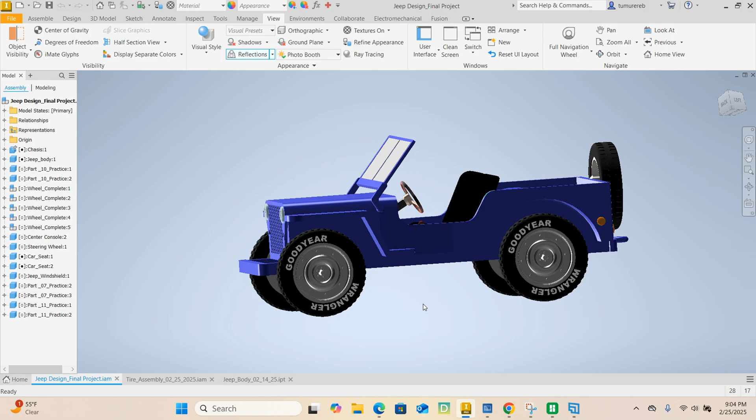Welcome back. We are continuing our practical applications with Autodesk Inventor, and this is going to be your midterm project. It is a Jeep. We are designing a Jeep that can be 3D printed.

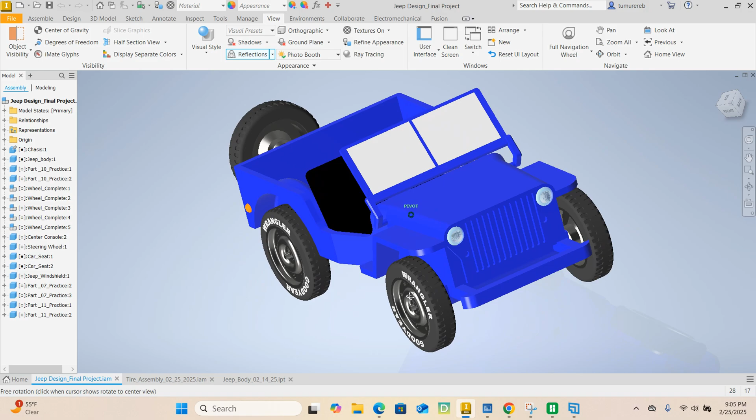The way we're going to do this, we'll do one part at a time. So what have we done so far? We finished the tire, and next we're going to do the body, and then the seats. We also have the dashboard, steering wheel, windshield, and lights. So it's going to cover almost everything we have seen so far.

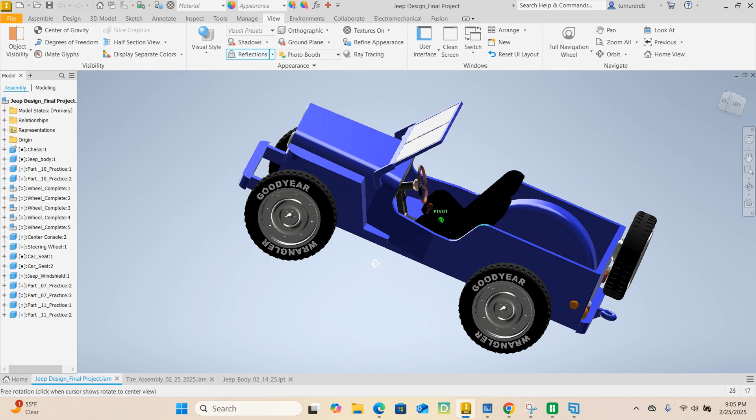Alright, so last time we did a tire, so we completed the tire. And now let's go ahead and work on the body.

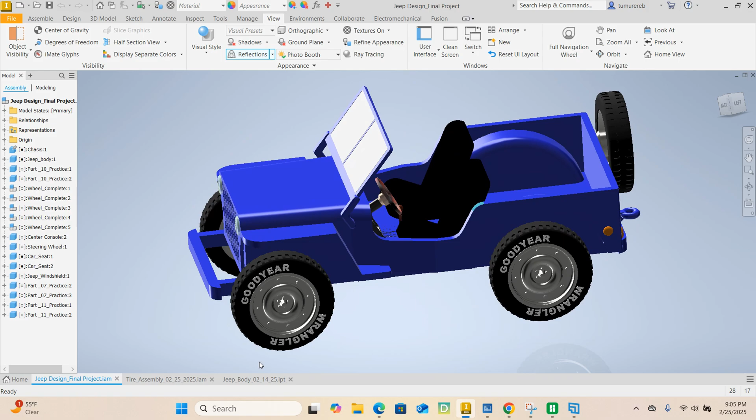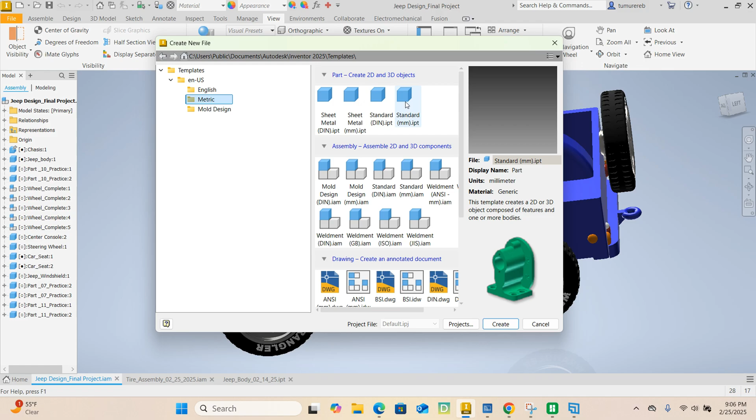This is very important, make sure your units are correct. If you don't pay attention and use the wrong units, then when we do assembly, everything is going to be out of scale. So pay attention. File, select new, metric, so we are in the metric standard.ipt, and then create. Alright, so the body, that's what we're going to do.

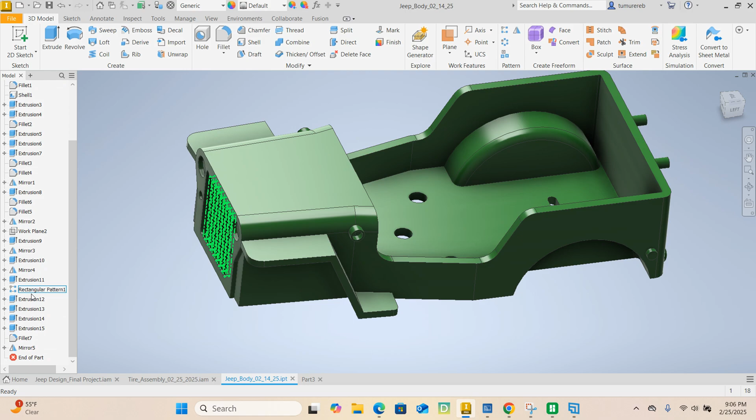The first step is done. Now, if you look at the body, it is essentially a box. Look at my browser history, it's extrude, extrude, extrude, extrude. There's no new command you haven't seen. This is going to be a very quick one.

I'm going to go in and do a 2D sketch. Let's go ahead and start a 2D sketch on which plane? XY plane. Draw a horizontal line starting at origin. How long does this need to be? Let's make it 240.

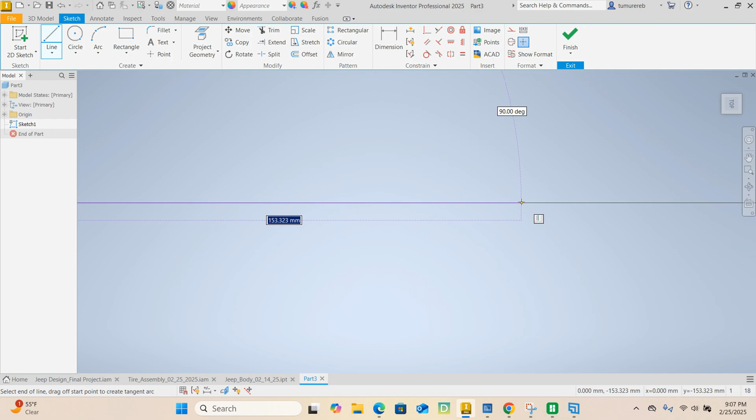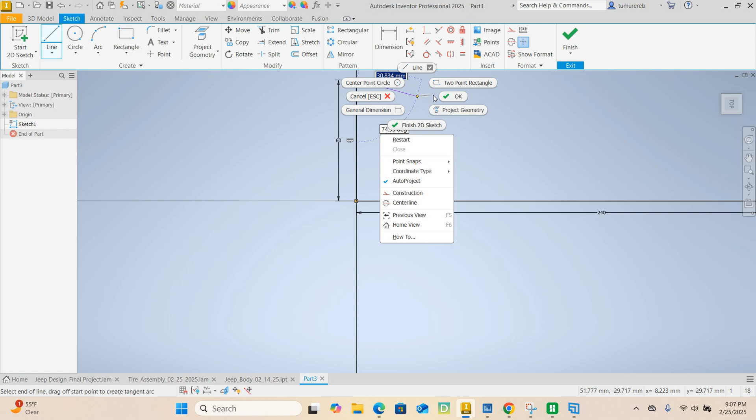And then we're going to come at the origin, draw another line. This one needs to be 60, and make sure it is drawn at a vertical angle, so it's 90 degree, so it's perfectly vertical. And this one is perfectly horizontal.

And then from here, I'm going to draw another one. This one, again, look at my constraints. This one's going to be 110, and it's exactly drawn at 90 degrees.

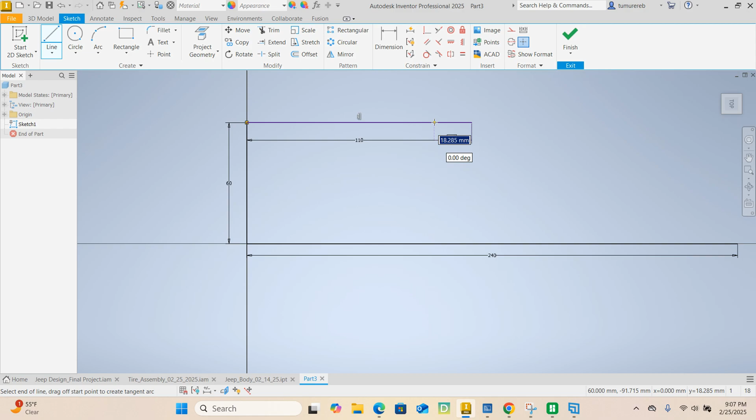So next we're going to draw a slender line like this. I'm going to draw it over here, and I drop another one there, and then close your profile here.

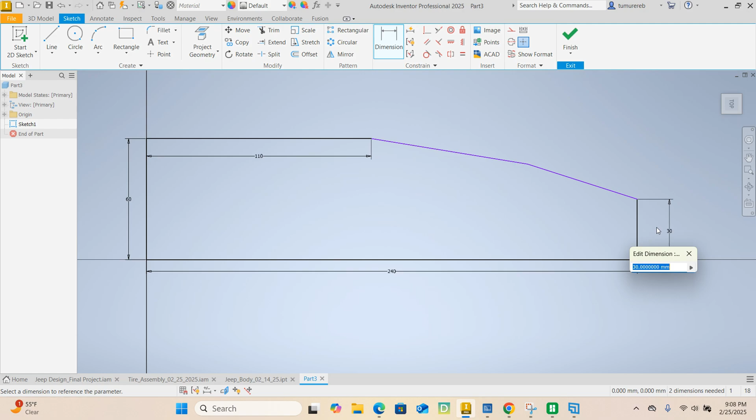Awesome. Now let's go ahead and add dimensions. So from here to this point, that distance needs to be 40, and from here to there, that needs to be 44.

This horizontal distance is 64.

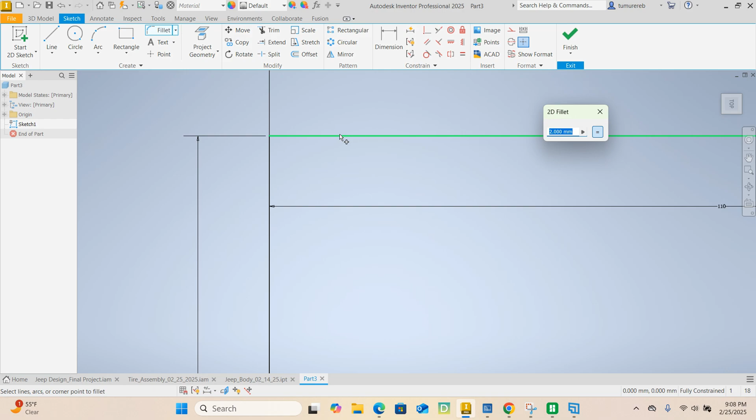Very well. Now let's go ahead and add a fillet, this corner of 6, radius of 6. Fillet that. And I'm going to zoom out so you can see what I have.

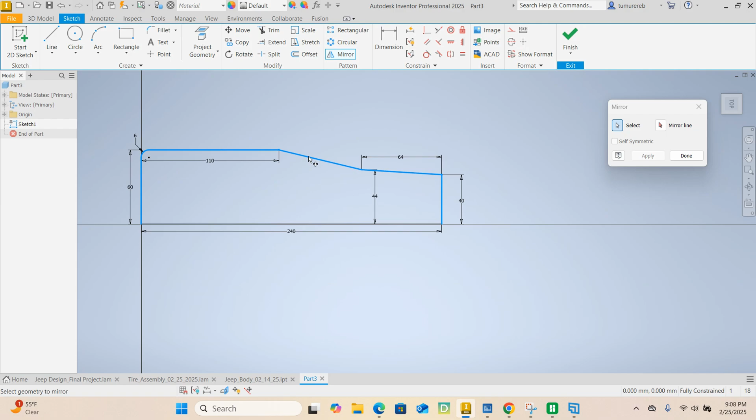Alright, now let's go ahead and apply the mirror command. We're going to select this and that. Okay, the mirror line is going to be this one. Apply, and done. Now select this line, make it a construction line, and then finish.

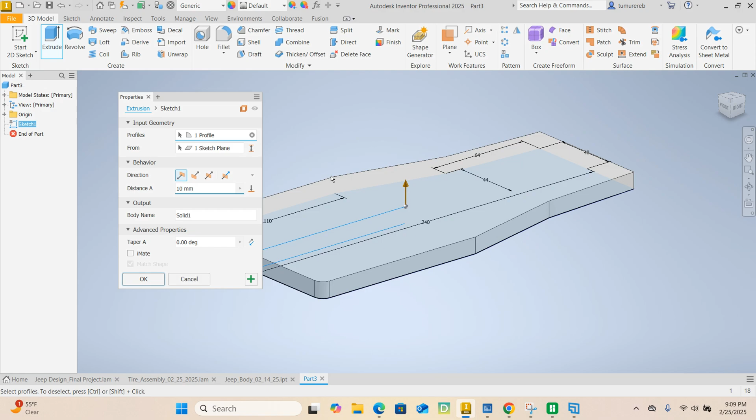What are we going to do next? You guessed it right. Go ahead, extrude. How much? 10 millimeters. Well done. Part 1 is done. So remember, this is what we're trying to get to.

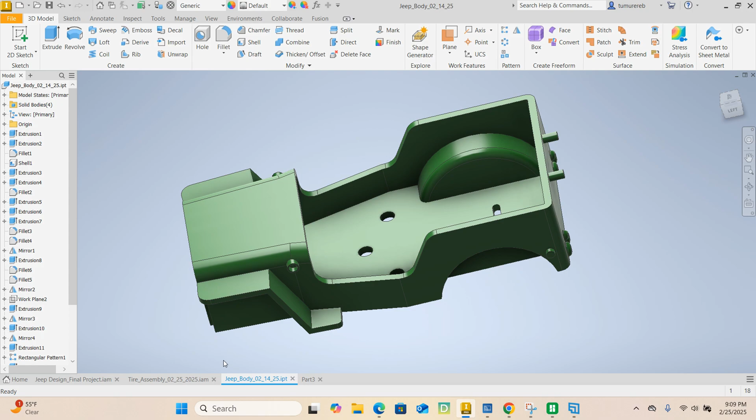Okay, so if I go here, extrusion 1 is done. Let's keep going. Select this top face. Start a 2D sketch on it.

Project geometry, project geometry. Select this face. Project geometry, and then right click. It's too easy for you guys.

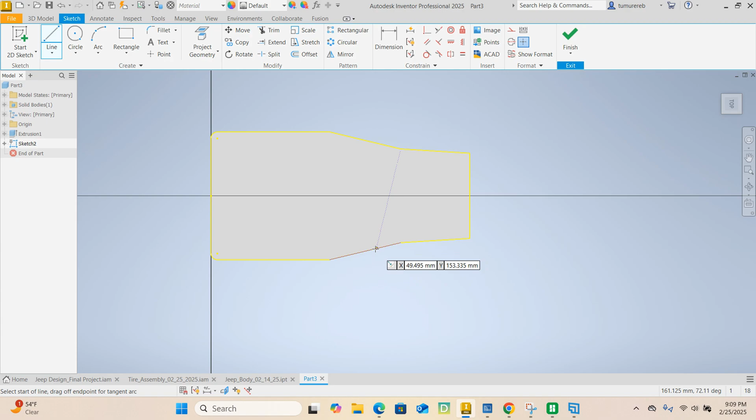And then we're going to do what? Draw a vertical line from this point to this point. That distance is going to be 76. From here to here is 76.

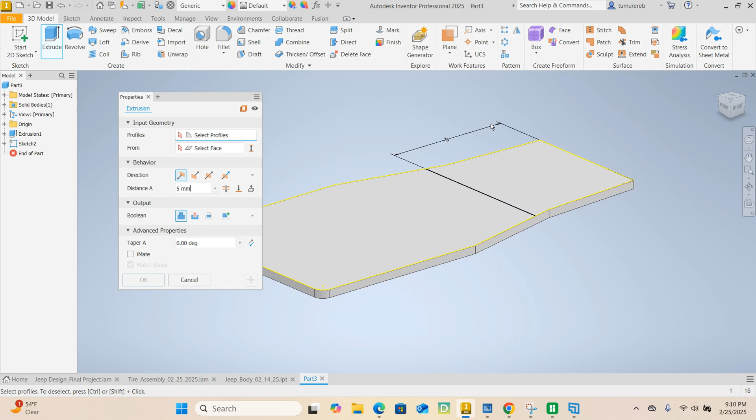Finish, and do what? Extrude. How much do you need to extrude it by? 50. Well done.

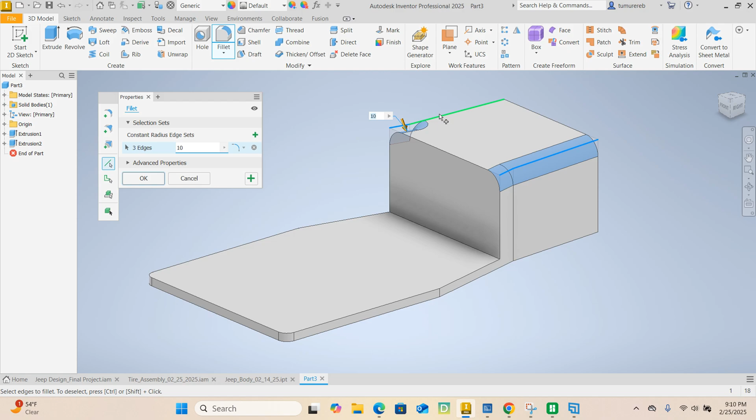We can go ahead and add fillet. Radius is going to be 10. We're going to fillet these edges. Radius of 10. Click OK.

Select this side. Launch your shell command. Remember the shell command? What's the thickness? Let's do 5. Thickness is 5. And I click OK.

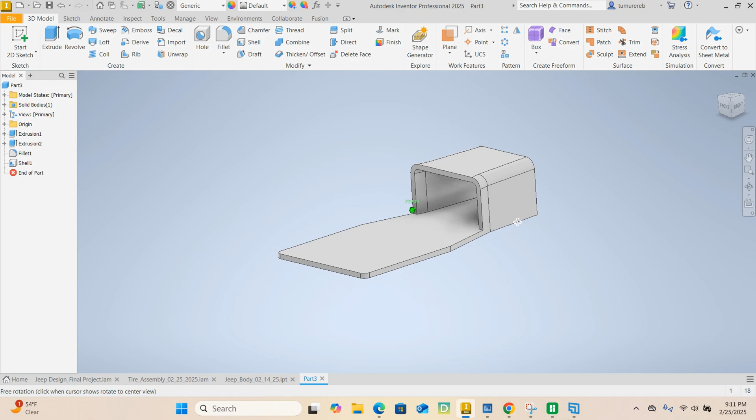Done, done, we are almost there. It looks like a shoe right now. Awesome, I'll select this guy.

And what do we do now? Project geometry again, project geometry, select the face. Now we can offset it. How much are we going to offset it? Now, when you offset, make sure you have loop select unchecked.

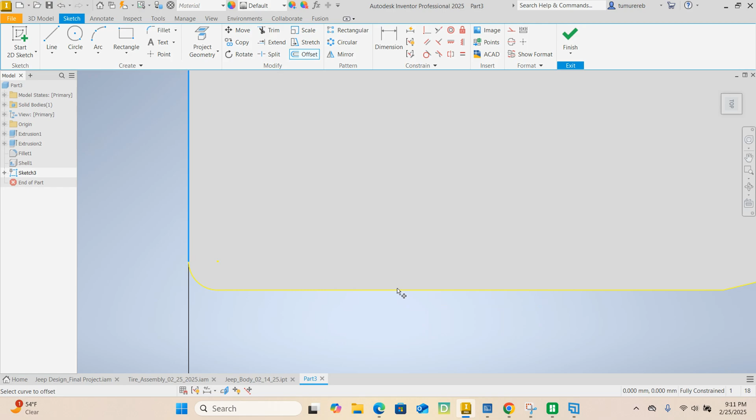How do you do that? Offset, then right click, make sure loop select is unchecked. Alright, what that's going to allow you is to select each part separately, each line separately, each geometry separately. Now, why is it not selecting there? There you go, there you go.

Now we can offset it by how much? Type in enter and then do a distance of 5.

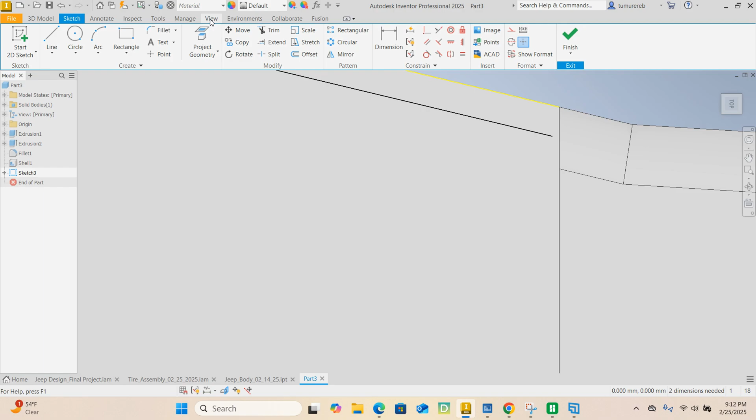Well done. Next, we need to project geometry. This edge and this edge, as well as this one. Right click and then extend. Extend is under modify. Extend this line to this point, and extend over there. Okay.

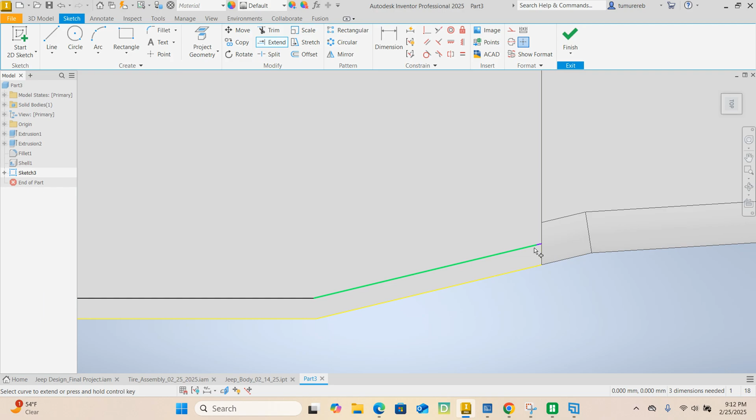Finish, finish. Extrude. Extrude 50.

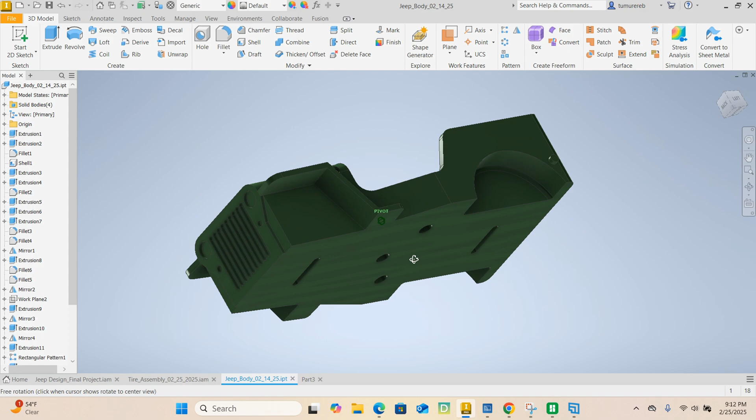Wow, look at us. We are almost there. We're almost there.

Now next we need to select, go to origin, find a YZ plane and start a 2D sketch on it. We can slice graphics to see better, and we're going to draw a vertical line starting here.

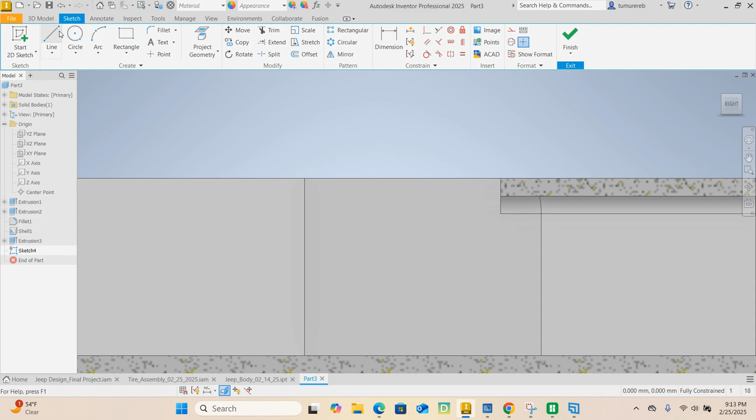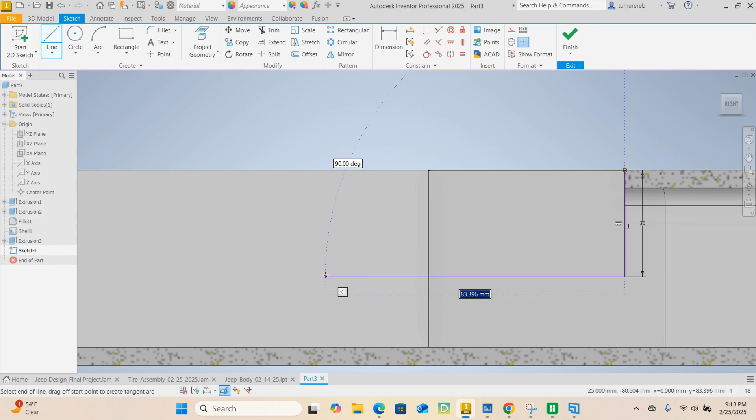Go ahead and draw a vertical line from here, going down. The distance needs to be 30, and then go horizontal. Make sure you have a perfect 90 degrees. Do we know how long this needs to be? Doesn't matter. And then go up to this point.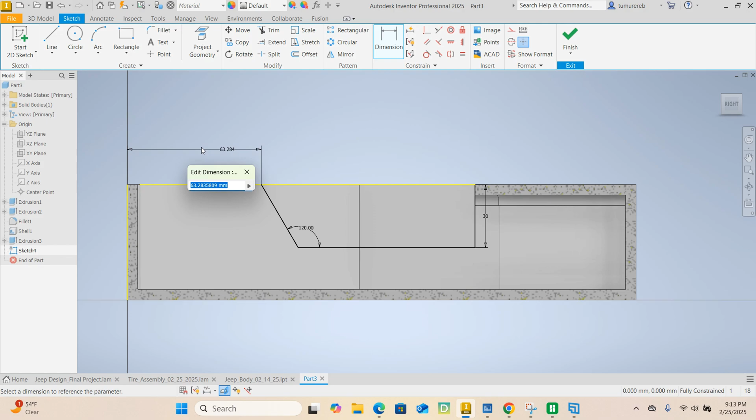Just approximate this one. The dimension we need is this one. We need that angle to be 120, and the distance from this edge to this point needs to be 64. Finish your sketch.

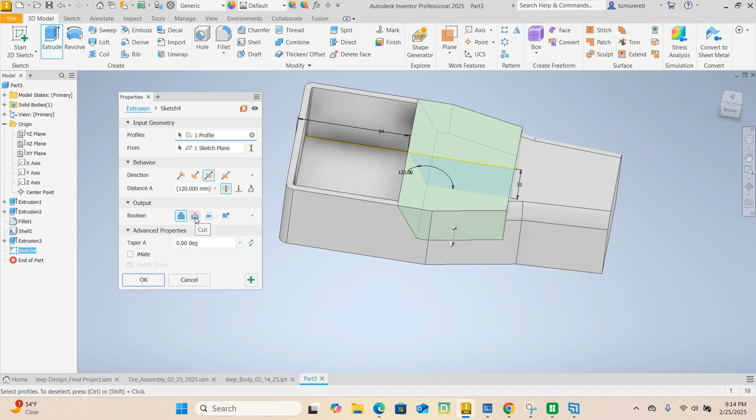Now we're going to extrude it. We're gonna cut, and then the distance is gonna be through. And then we're gonna cut it. There you go.

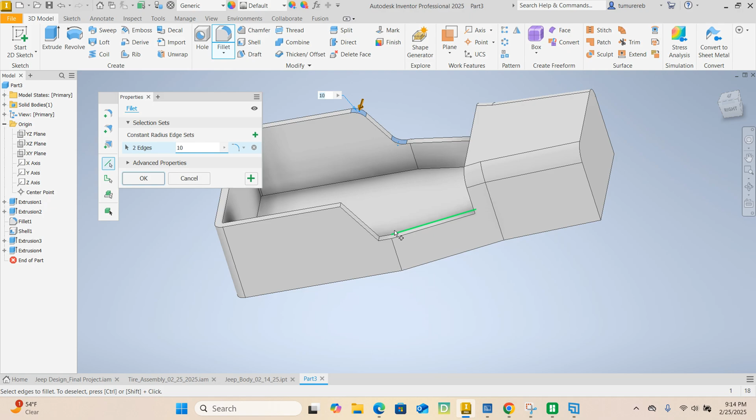Next, fillet. Radius of 10 is good. Select this edge here, select that as well. There's one more, and also this guy here. Same thing on this side: this point, that point, and this point. And then click OK. Well done.

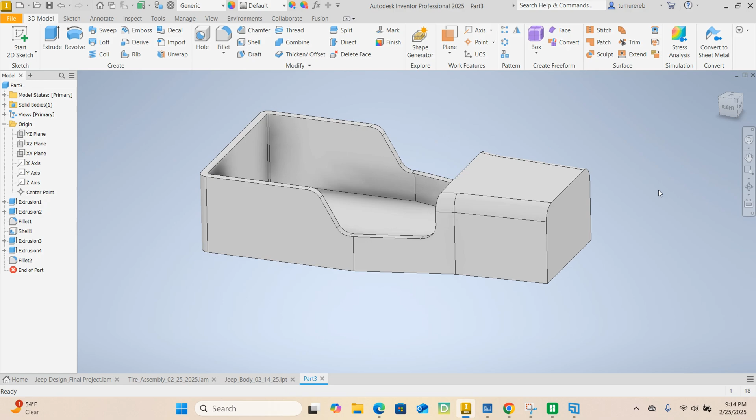Next, select this face, start a 2D sketch on it. You could go slice graphics - remember, one of the options at the bottom is slice graphics. You can also find it under View and Slice Graphics, whichever is easier for you. I like using this shortcut, or you can press F7 on your keyboard.

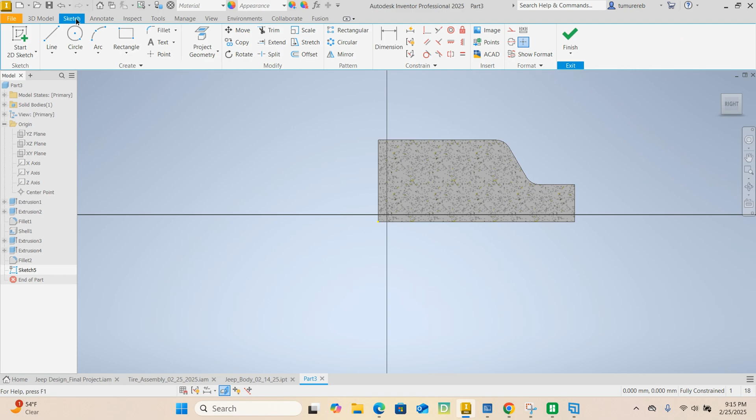Now, so we're doing a 2D sketch. Go back to Sketch tab and draw a circle about here. Now when you draw a circle, notice mine is measuring a radius. If yours is not, right click and make sure you have radius checked. If it's measuring diameter, now if I switch to diameter, it's gonna measure diameter. So right click and set to radius. We need this radius to be 44.

We're gonna draw another circle from the same point, and the radius is gonna be 40.

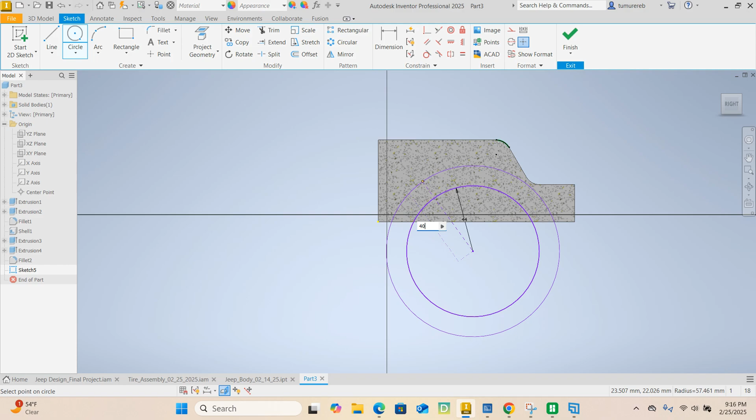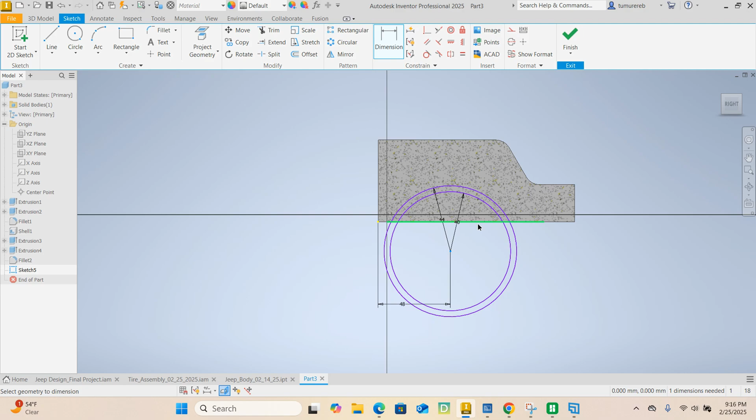Next, we are going to dimension from this to that point. That distance is going to be 48. Let's make it 48. Also, from this point to this point here, we need that distance to be 8.

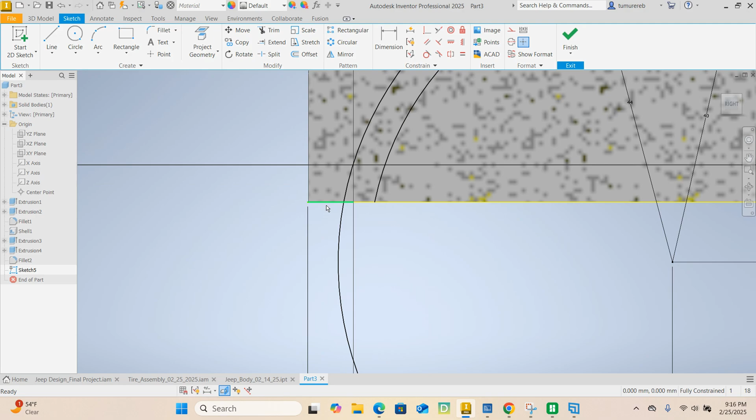Enter. Very good. And now we can trim under Modify, the Trim command - it's the one that looks like scissors. Go ahead, trim that. I forgot to project this line here. Project that line, and trim again. Awesome, it's gone. Now that's the profile we want.

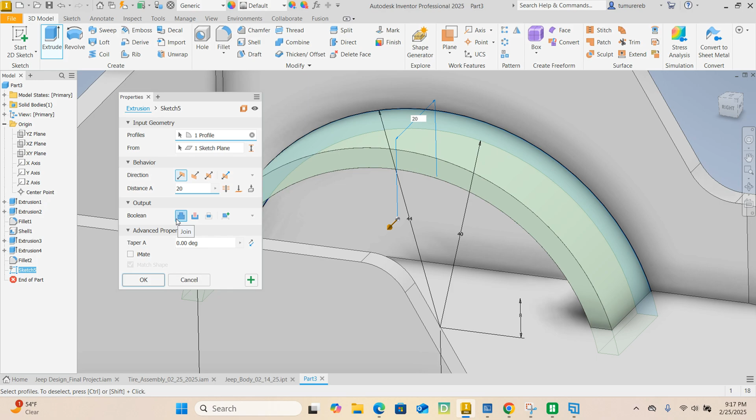Awesome, extrude it. How much do you extrude it? I'm gonna extrude it by 20. Direction is gonna be default. And output is done, select OK.

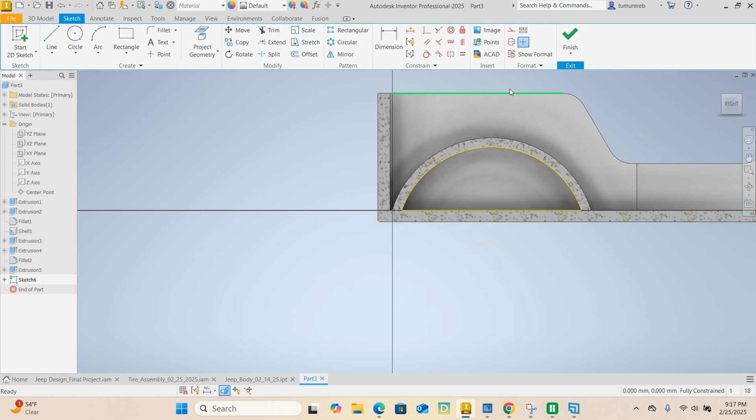Alright, now zoom in, select this face here and start a 2D sketch on it. Slice graphics again, and take advantage of project geometry. So I'm gonna go ahead, project geometry, and select that area. Now finish sketch.

We're going to extrude it, but we're going to extrude it flipped - that's the direction, the second option. We're gonna keep it a join. We're gonna do a distance of 10.

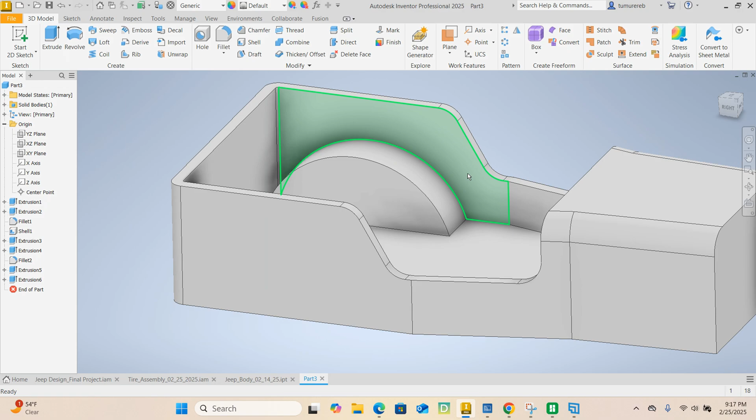Alright, now we can go ahead and fillet. Radius of 5, select this edge here, add. Now you're gonna select this line there, and the radius is gonna be 2.5. And then click OK. Very well.

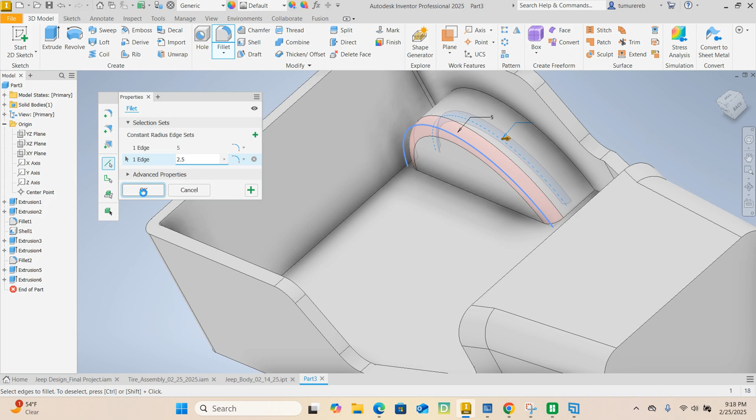Now rotate until you see this face. Select this face here, start a 2D sketch. And we're going to do a circle command again, about there. Radius is 40.

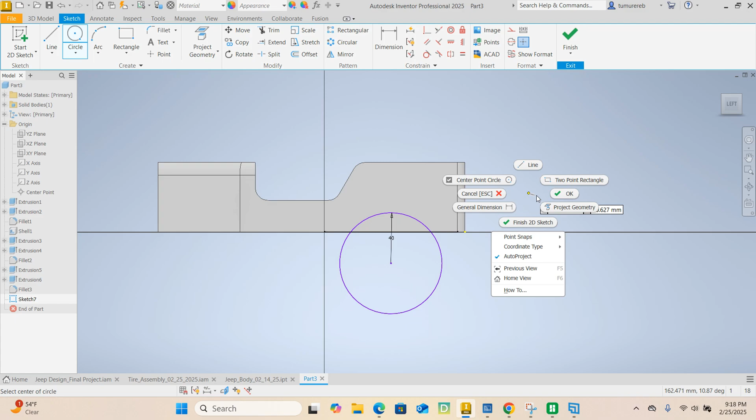Distance from the center of the radius to this point, we need that to be 48. And from this point to here, it's gonna be 8, like we did before. And then, maybe I should have used project geometry, but that's fine, it's not too bad. Just one second. Finish your sketch.

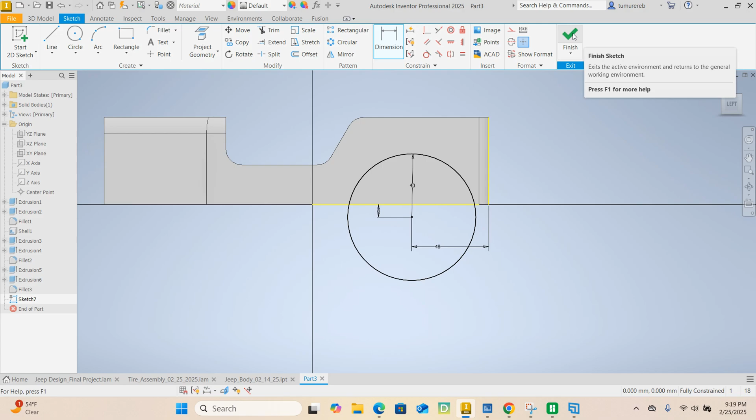Extrude it. How much do you want to extrude it? Alright, 20. Which direction? Flip. We're gonna cut this.

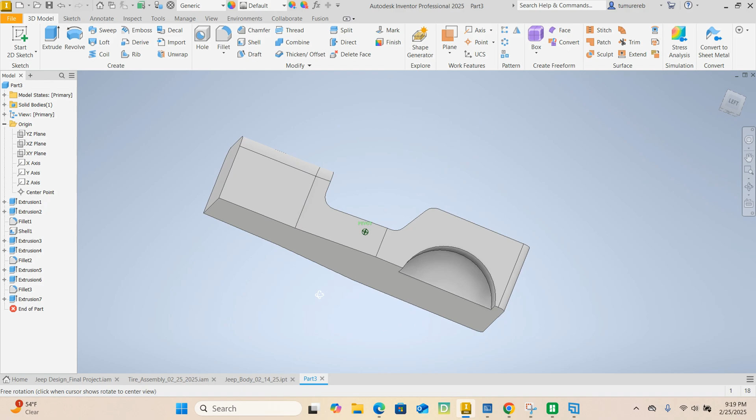There you go. Now, once you get here, look where we are, and let's see what we're trying to do. We're trying to make something like this. Now we got this part here done.

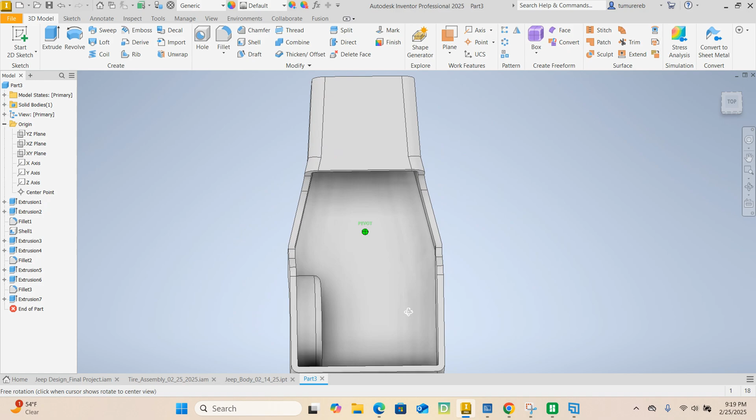And we need to make another one here. We have two options. We can redo the same thing we just did, or we can work smart and take advantage of the mirror command. We're just going to mirror everything on this side by the mirror plane so that it's on this side. How are we going to do that?

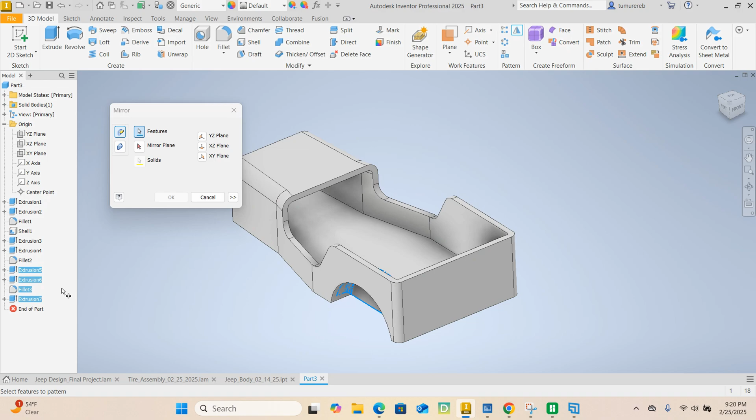Launch the mirror command and press shift. You're going to start with extrusion 5, 6, and 7. Make sure you have your fillet selected as well. Then select your mirror plane, the YZ plane. It gives you a preview of what it's going to make, and if you like it, go ahead and select OK. And there you go, that is done.

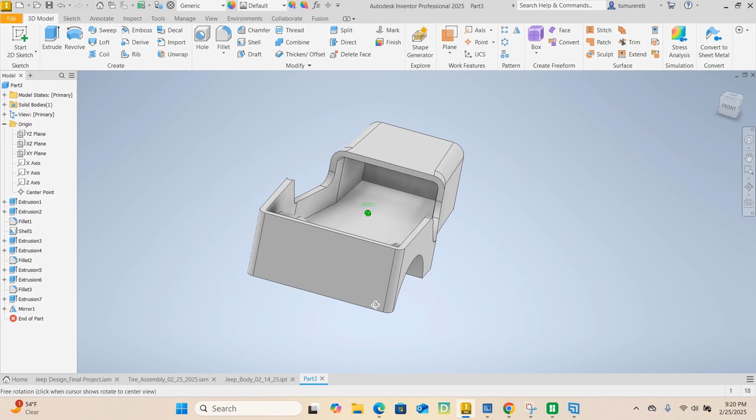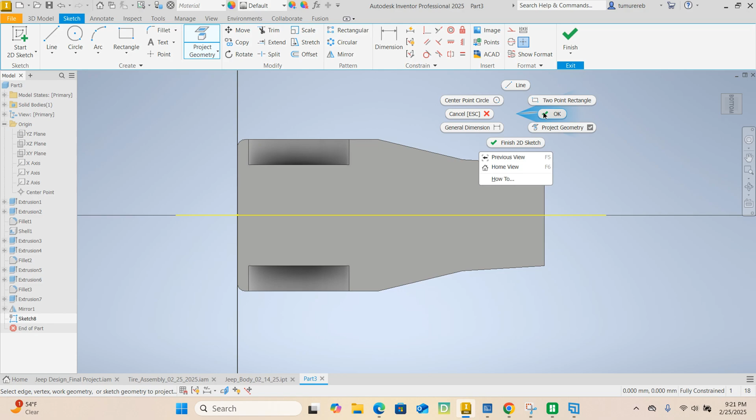Okay, we're almost there. Now rotate it till you see this bottom here and start a 2D sketch on it. We're going to go to origin. I want you to go to project geometry and select the Z axis, then select this line, right click, and make it a construction line.

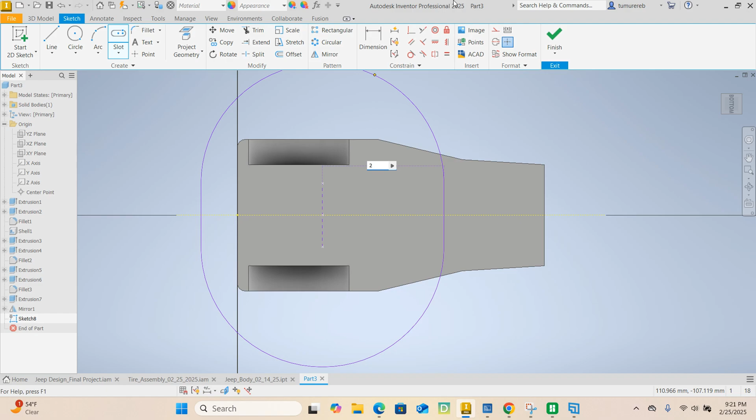Go to the rectangle command, open the drop down, and find slot center point. Draw a slot like this. Radius, let's make it 2.5.

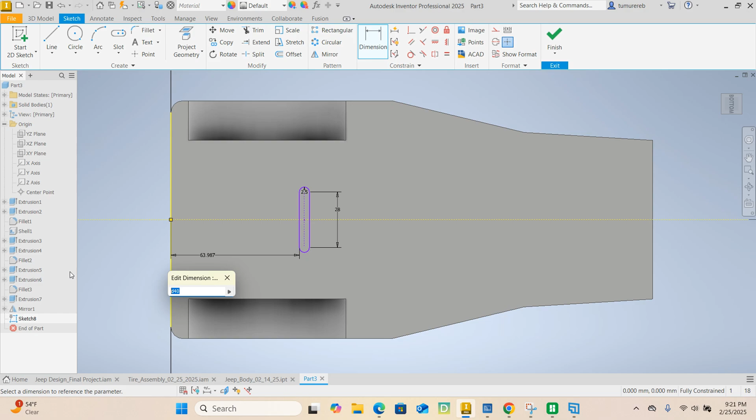And this distance needs to be 28, and from this point to this point that needs to be 30. Okay, all right, next we're going to draw a circle about here.

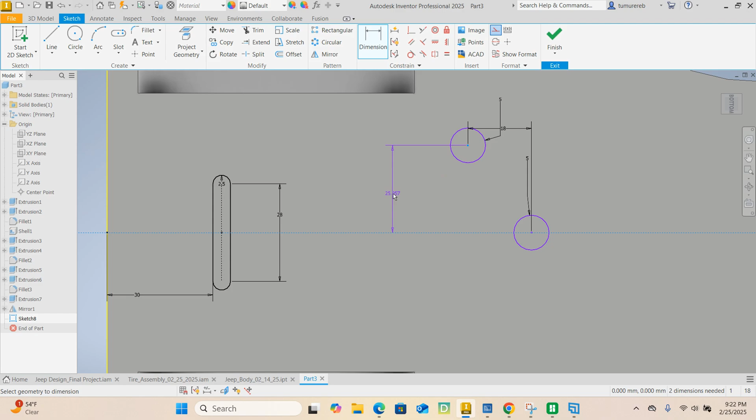What's the radius of the circle? 5. And draw another one here, radius is also 5. Now the distance between these two, let's make it 18. From this center to the construction line, that needs to be 30.

Now we're going to draw another slot about there. Remember, radius is 2.5. And let's go ahead and take advantage of the equal constraint. We want this side to be equal to this side. Select equal, select this side, and also select this side. They must be equal. Let's double check that, that's indeed 28, which is what it's supposed to be.

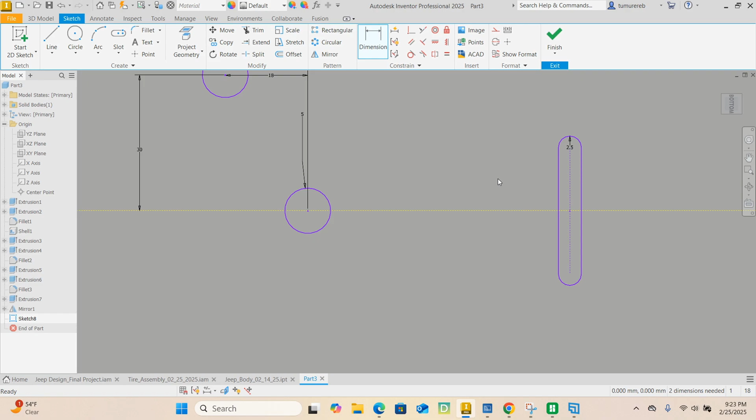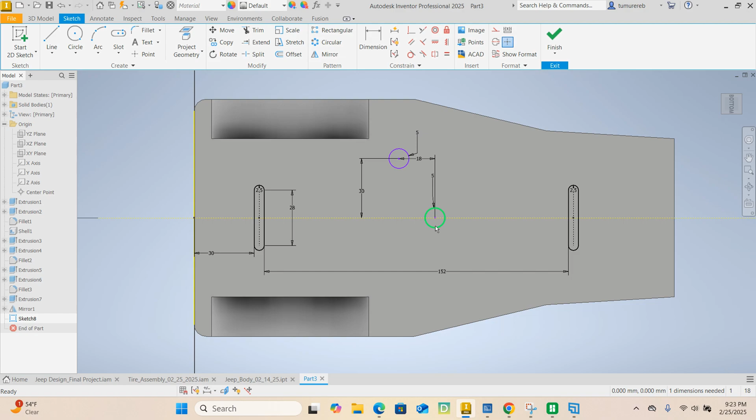Now what can we do? So that's 18, 30. Dimension the distance between these two, that needs to be 152. Now it's telling us we have one more dimension missing. That's fine, but before we do that, I think I know what it is. It's this one, from here to there, that's 65. Now it's a fully constrained sketch.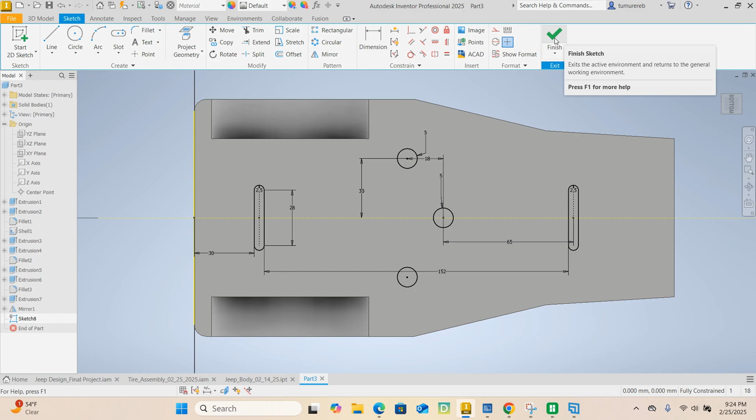Let's go ahead and apply the mirror command, so we need to copy the circle. We're going to copy by this line, apply, done, done, done, done. Okay, now finish sketch, and we're going to extrude.

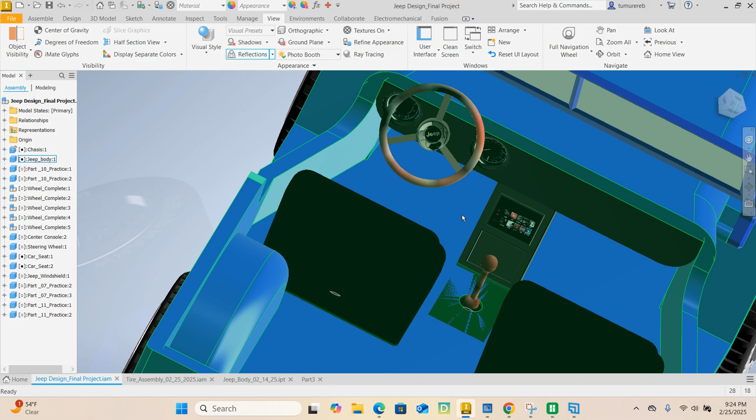I told you guys this is extrude, I mean we're going to look at other commands when we're doing the other parts, but the body, it's a box. You're going to see more advanced commands, but I think we've seen everything we need to complete this.

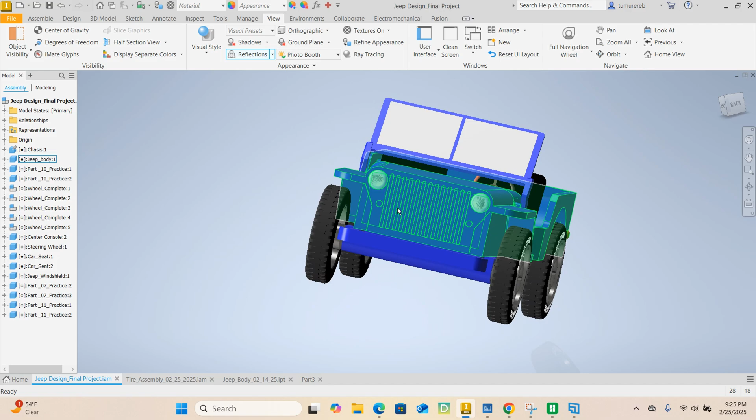And we're going to make it electric. Where are you going to put the batteries? Huh? Start thinking about that.

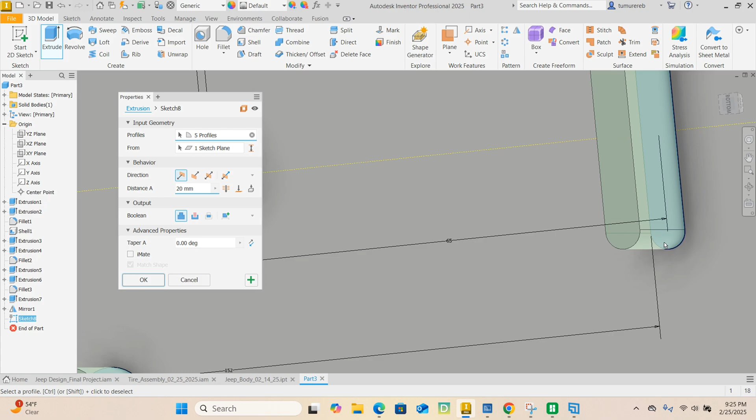All right, let's go ahead and do that part. Finish this one. All right, so we're going to extrude it. Select this profile, 2, 3.

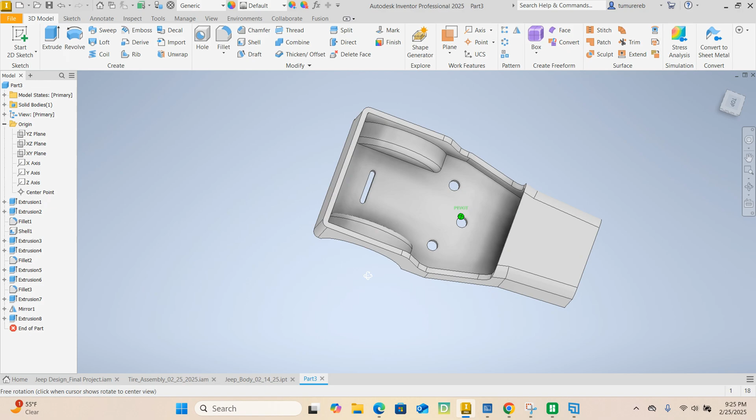All right, now we need to reverse the direction. Reverse, split. We're going to cut, and for distance select the option that says To, then shift and rotate. Select this face here and click OK. All right, ladies and gentlemen.

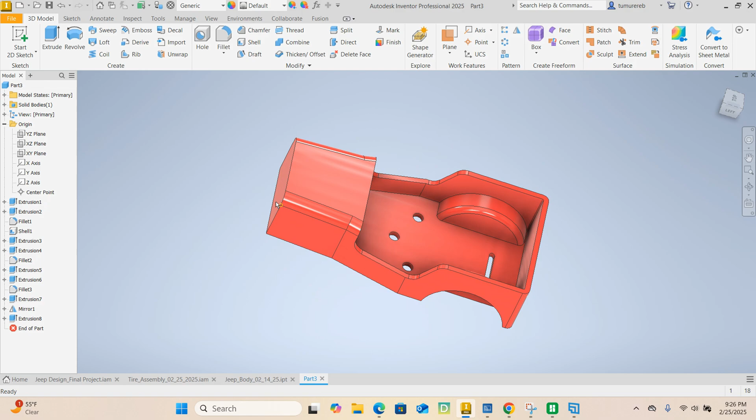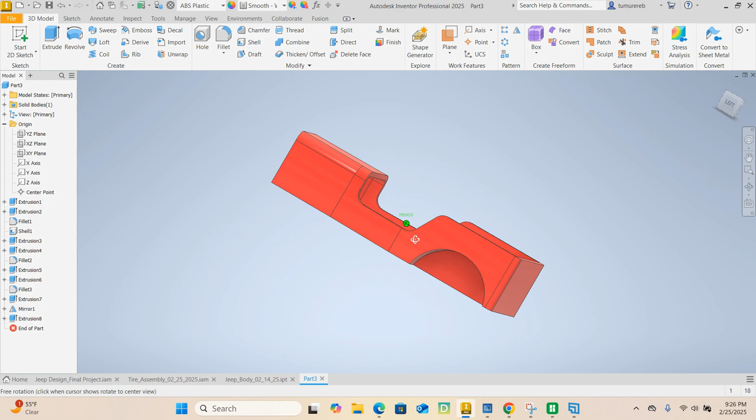And I want you to find the mass of this part. Go ahead and find the mass of this part, and you're going to show it to me, show me where the mass is. All right, remember how to do that? Do you remember how to do that?

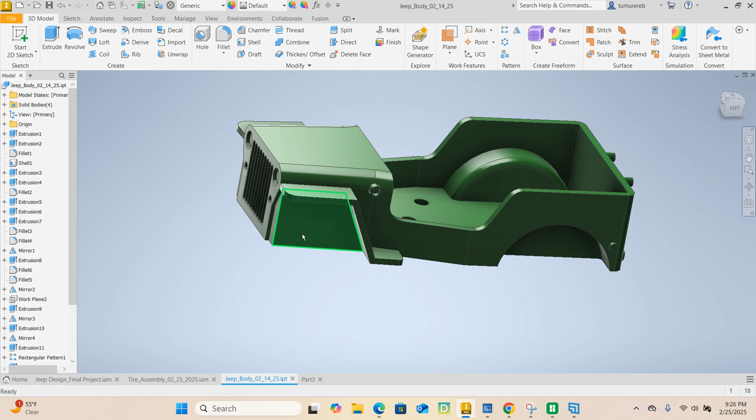Okay, well we still have a few more things to do. Now, I don't want this to be a very long video, so I'm going to end here and we're going to continue in part B, the rest. All right, let's go ahead and end here. And remember, this is what we are trying to get to.

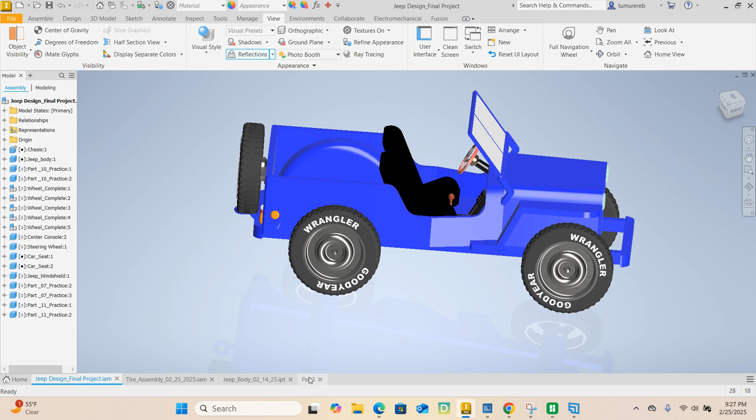All right, but for this classwork, I want you to get the mass. And you know what, about putting this in your portfolio? We're going to put it in once it is done. But you should have in your portfolio, you should have a tire. You should have a tire in, this should be in your portfolio. And the next one we're going to add is going to be the body, and then the other parts.